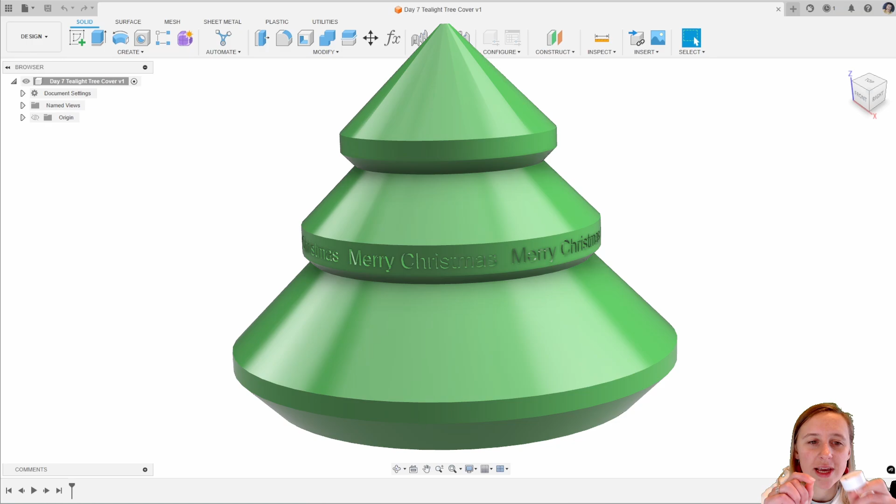For day 7, we are designing a tealight tree cover. Now, my plan is to design this such you can 3D print it in vase mode. So if you are doing that, you do need to make sure that you are using these LED tea lights. This is not safe for real fire candle lights. So make sure you're using these little LED ones. And what you want to do is just measure the diameter of the little tea light candle that you've got to make sure that this design works for your candles.

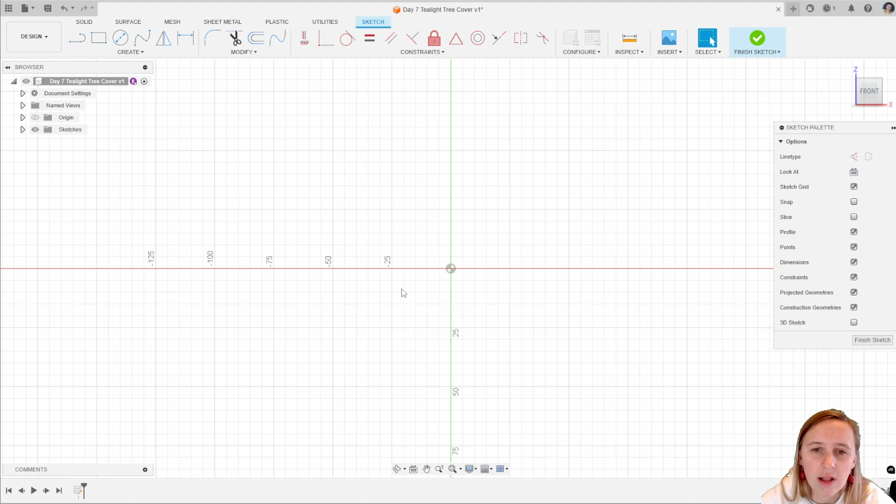So let's get started with this design. So this is a slightly easier one than last time. So we're going to start off with a sketch on the ZX plane. And this is going to be the profile that we are going to revolve to make that tea light cover. So starting off with a line, I'm going to bring that up and I want that to be 80 millimeters. And that's the height of the part. So if you've got a bigger printer, you could make a bigger one. If you've got a smaller printer, make sure you match that.

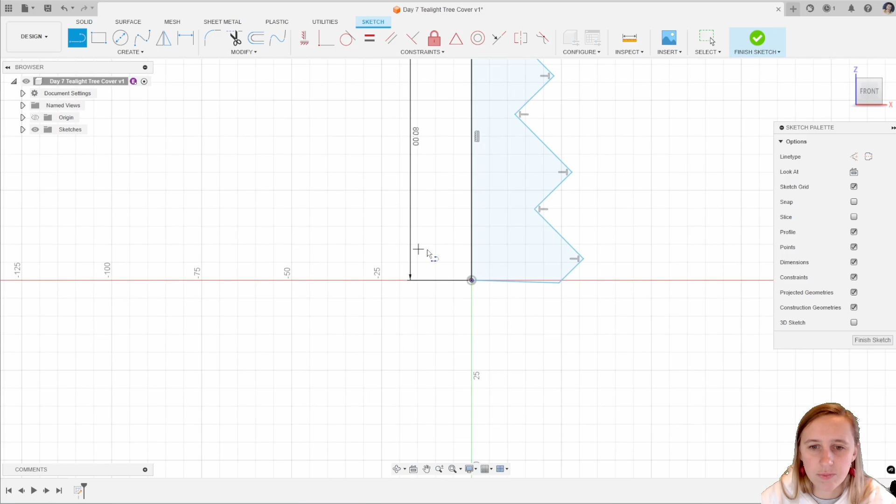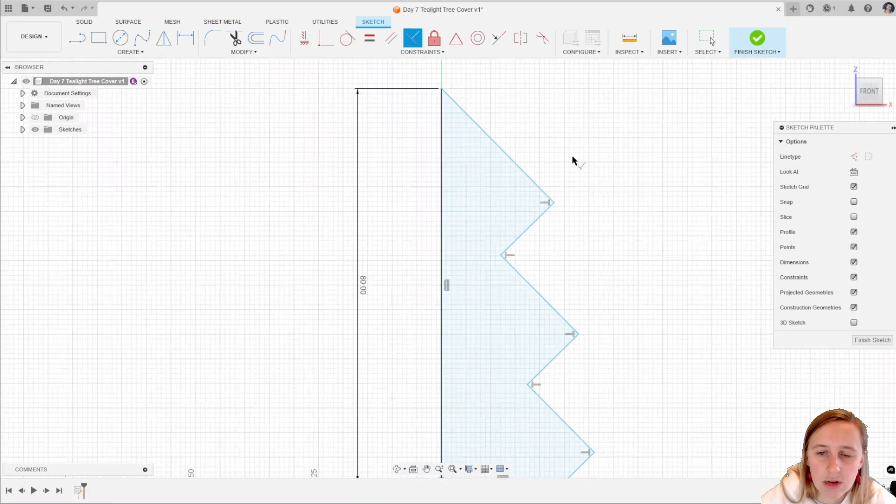And then essentially, I am just going to bring this out at 90-degree angles to create the basic profile of the part that I want to print. Now, I want this bottom line to be horizontal, so add a horizontal vertical constraint. Now, I've added these 90-degree angles automatically in that. If yours didn't add, for example, if you haven't got that and you can change the angle here, what you want to do is add this perpendicular constraint between these two lines and make sure you add that between all of these lines going down.

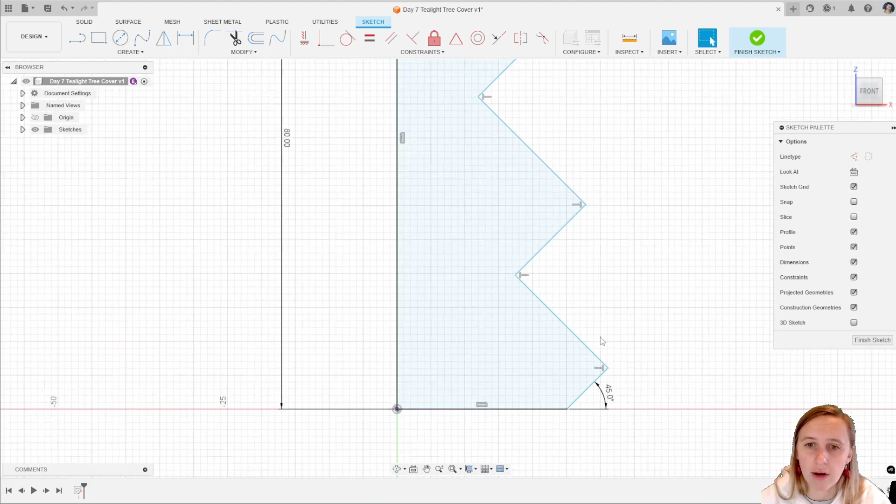This means that each of the lines in the tree will be at 45 degrees from the horizontal, which means that you can print it without any support material, so this will self-support. The final one you want to check is this last one down at the bottom. So adding a dimension between there and there, we want to make sure that one is 45 degrees. And then we can start making this the size that we want it to be.

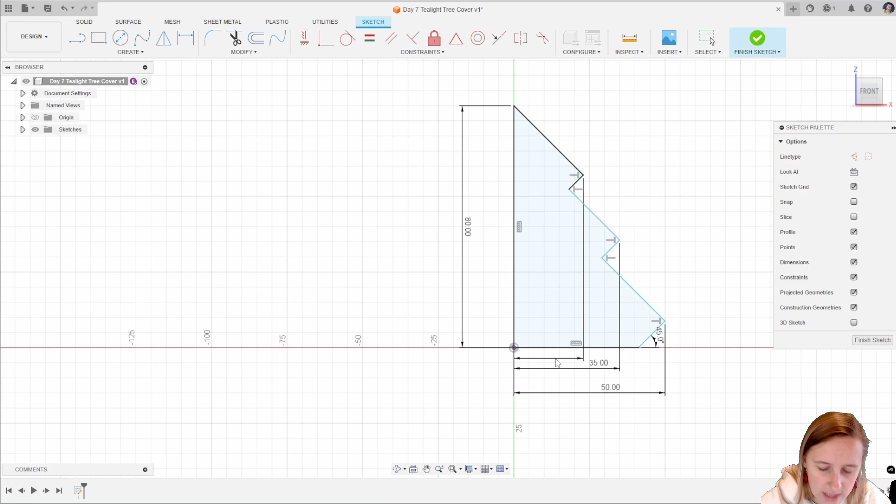So my overall size, I want to go from here to here. That is going to be 50 millimeters. And then you might just have to drag the lines to get a good size. So then the next one in is going to be 35 millimeters. And then that final one there is going to be 25 millimeters. And then you can just move these around until the design looks as you want it to be.

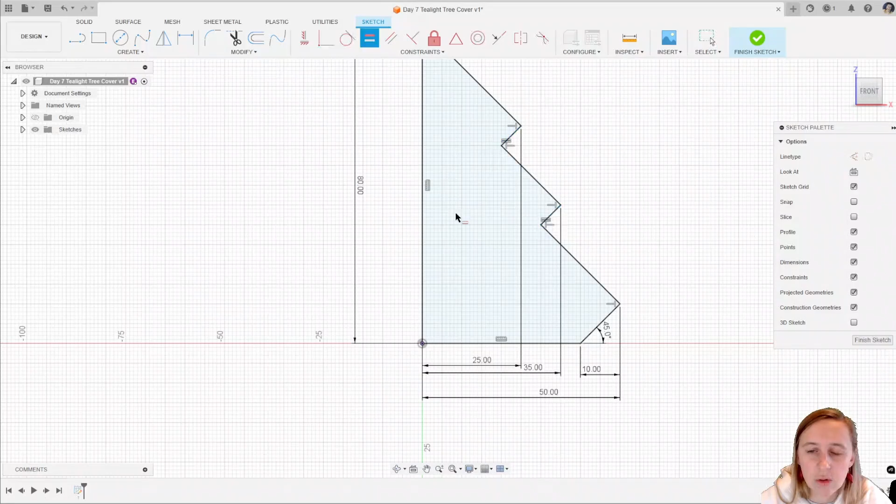So I want this one here to here to be 10 millimeters. And then I would like the length of these two to be the same. So selecting both, I'm going to use the equal constraint. And you can see that we have a fully defined sketch now. So that is the overall size of the part that I want to make.

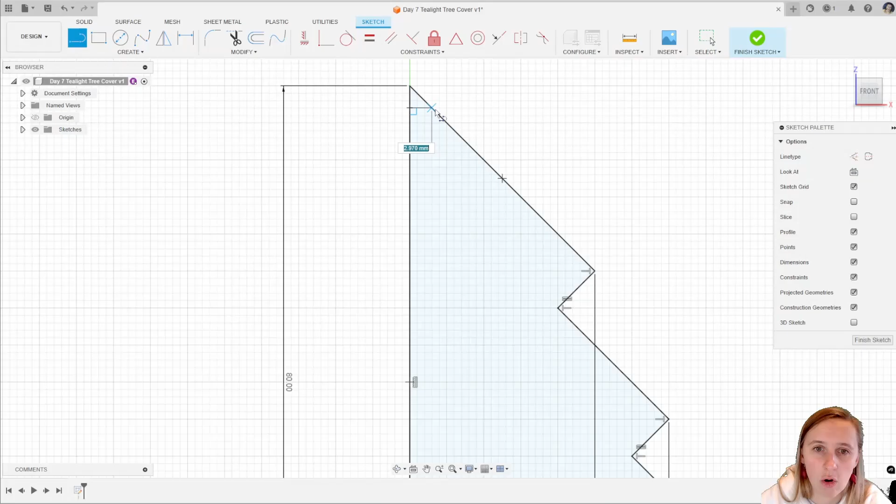Now I'm also going to add in some flats and we can use this to customize the part if we want to. And the same as we did with the bauble, we don't want a complete point at the top because this makes it difficult for the 3D printer. So I'm going to add in a horizontal line here and dimension that as 1 millimeter just to give us a small flat on the very top.

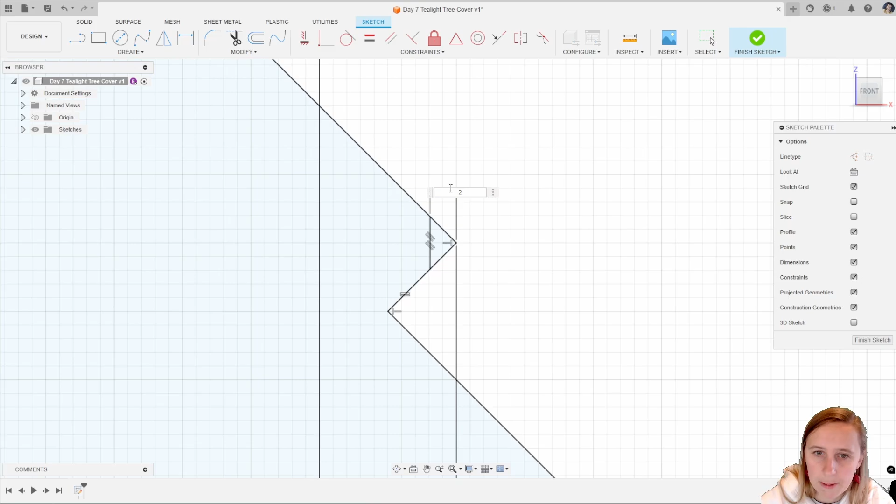I'm also going to add in a line here, a line here, and a line here. And this is going to give us a little flat. And the dimension of those, I want that to be 2 millimeters. And I want that to be the same in all cases. So just adding that in to give us a 2 millimeter point there. I'm going to finish that sketch. I'm then going to use a revolve, selecting that profile around my Z axis. And you can see there we have a very basic tree shape here.

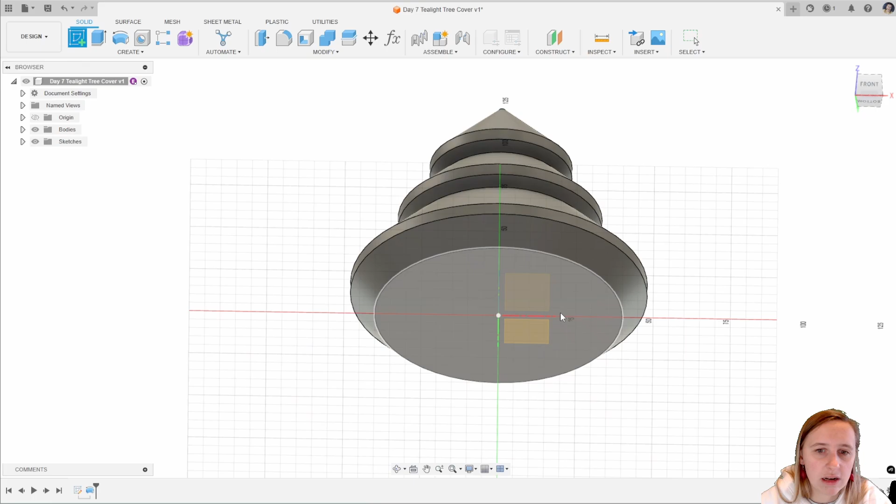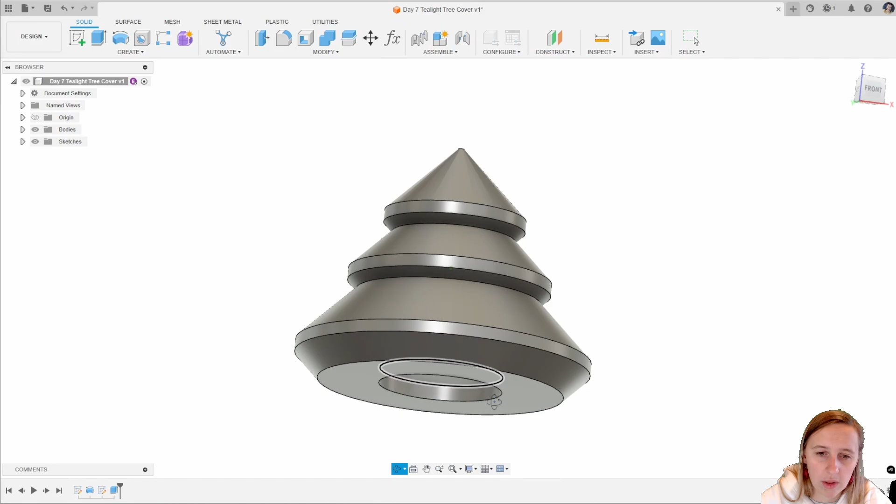So what we're going to do to make room for that tea light at the bottom is on the bottom plane, create a sketch, do a circle. Now I've measured my tea light and I know that a 40 millimeter diameter circle is going to be sufficient to stick that tea light in the bottom of there. So finishing that sketch, I'm going to create an extrude and just bring that up by 5 millimeters and an extruded cut just to give me that little profile to work with there. And that will give you a little edge that will allow the tea light to sit into.

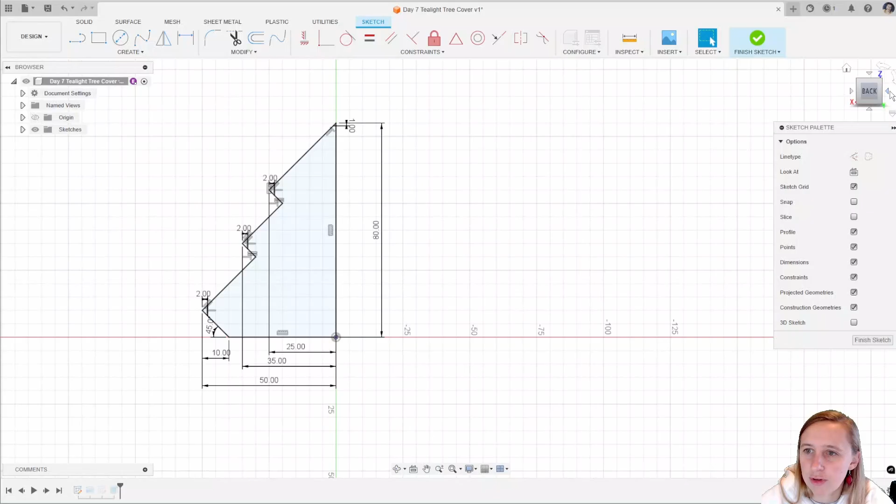Now you could just leave this design as is like this, or if you wanted, you could add a little bit of customization. So you could add in some words that say Merry Christmas around this middle band. If you want the band to be a little bit bigger, what you could do is edit this sketch. It's just flipped around from the direction we had it in before, and increase this offset here.

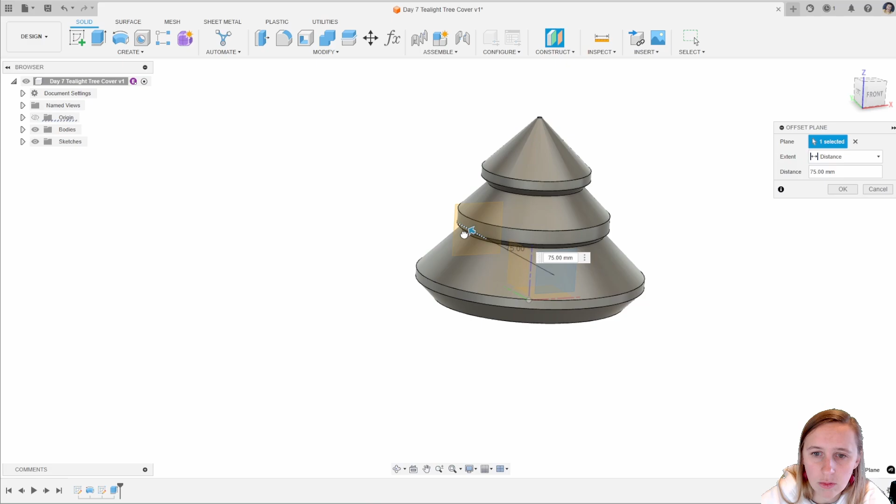So you could make that 4mm. And you can see it increases that band. So you want to make that a size that works for the text you want to do. So I might go with 3mm there. And what we're going to do is to construct an offset plane from the center plane and bring that out. So we knew that that was around 35mm out there.

And then I'm going to create a sketch on that plane that I've just created. Now I'm going to use the text tool for this. So adding some text here, I'm just going to place the box roughly where I'd like it to be. And I'm going to say Merry Christmas on here. But you could say whatever, season's greetings, happy holidays, whatever works for you.

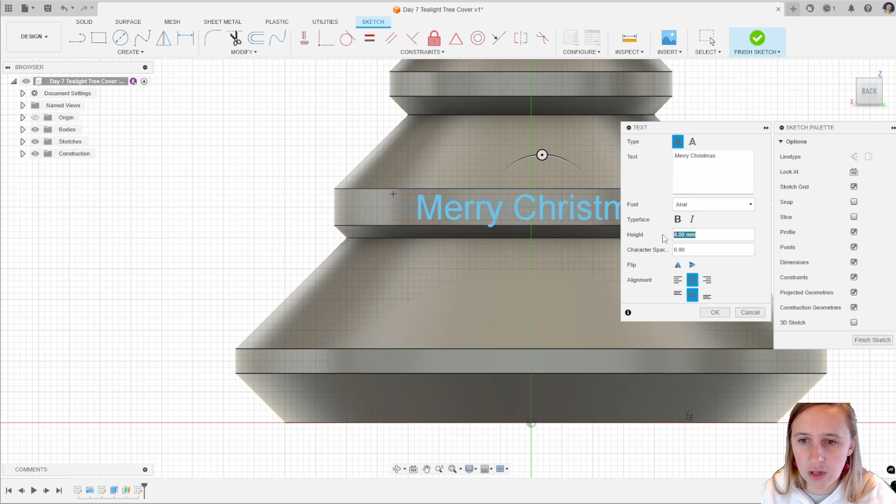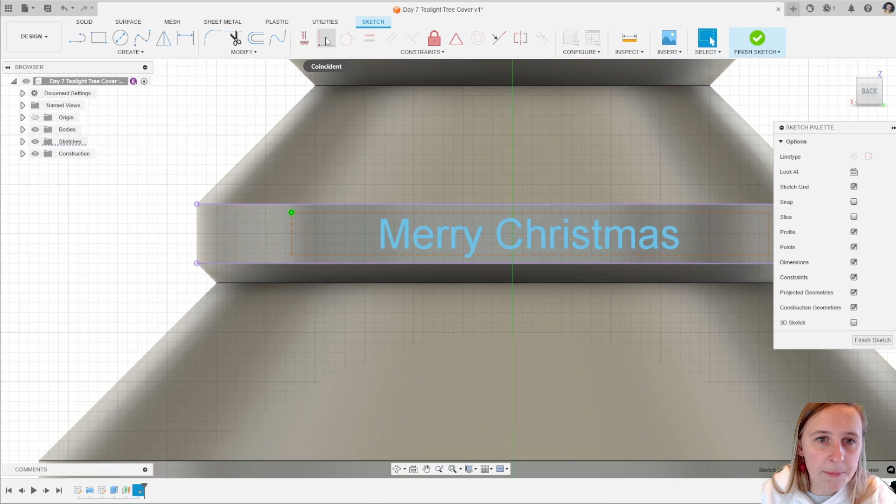So what you want to do is make sure that the size of that text is definitely no bigger than that size band that you created. You can actually, if we project through these two lines, so project that one and that one. So P on the keyboard is the keyboard shortcut. And you can define coincident that point over here and coincident that point over here, and that will put your text in the middle of that band.

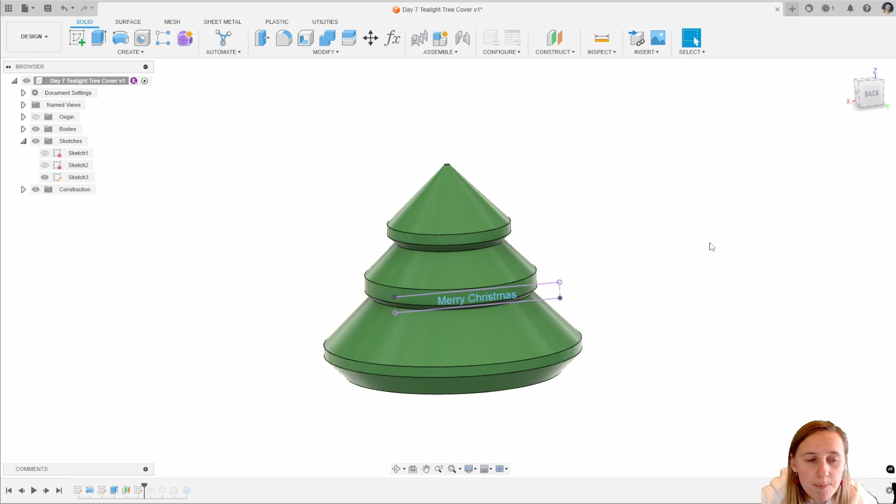I'm now going to add in an appearance to make this look a little bit more Christmassy. So A on the keyboard is the shortcut for appearance. Search for green, and I'm going to use that plastic glossy green and add in that appearance there. We're now going to emboss that text into the band that we've created to give it a bit of customization. So now that we have that text, we're going to use a deboss to imprint that onto the center band of this. So create and then the emboss tool.

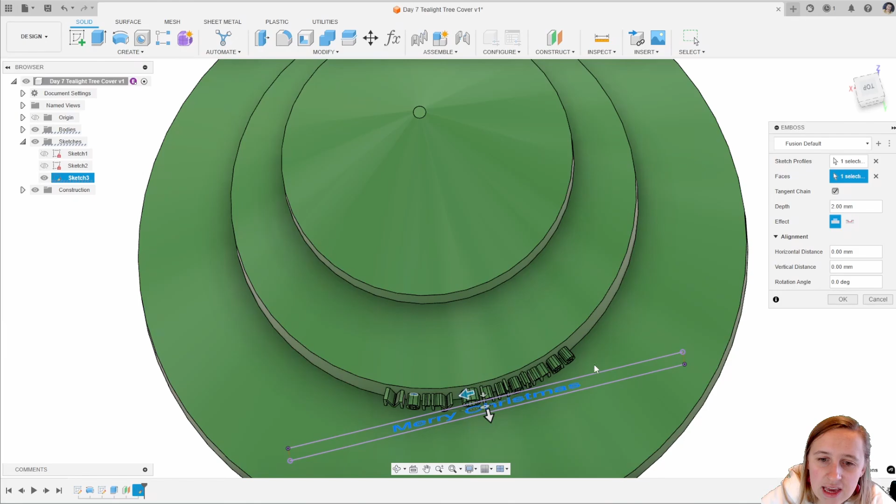The sketch profile I want to select is that text, and the face that I want to do is that circular face. Now you can see here that brings this to a curved feature on there, and we want that 2mm. Now if you're 3D printing this in vase mode, it actually is going to work much better with a deboss, so a slight cut into the part. So selecting OK there, you can imprint that text into the front of your tree there.

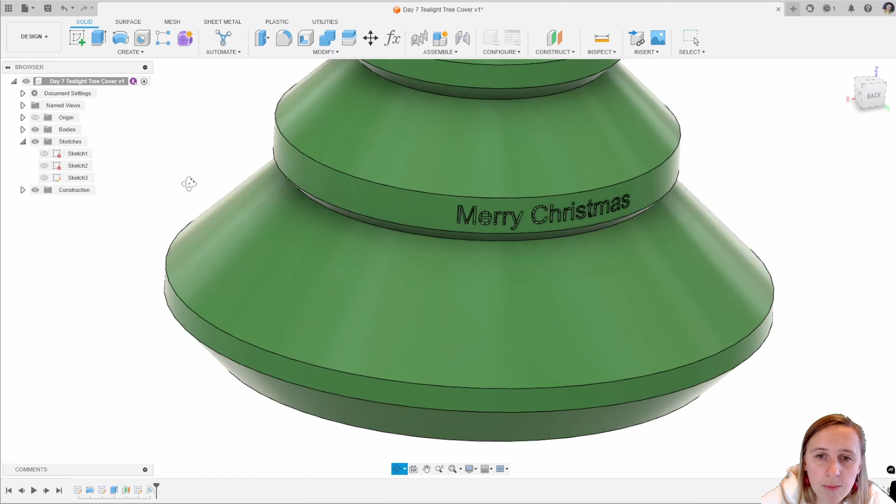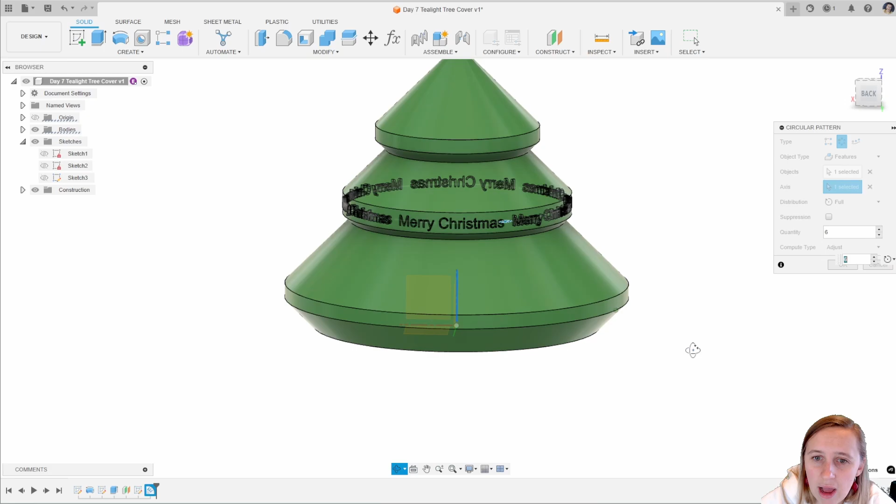And now if you wanted to, you could actually pattern this around the whole ring of this. So using a circular pattern, I'm going to pattern the feature of that deboss that I've just created and do that around the Z axis. So press and hold my mouse key and select the Z axis there. And then just increase the number until it patterns all the way around and you're happy with how that looks. So I'm going to do 6 there. And we can see now we have our tealight tree holder, and it says Merry Christmas all the way around that.

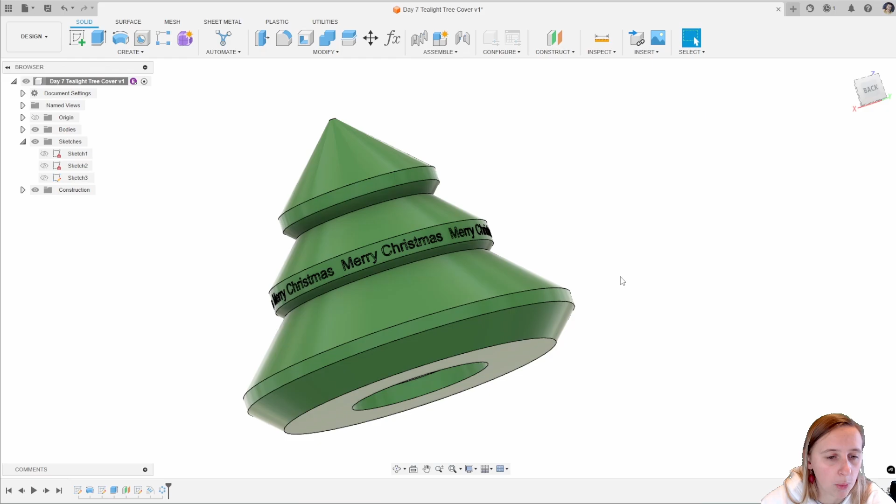Now I'll show you how to set this up for 3D printing in vase mode. So what you want to do is right click and save as mesh, selecting your format as STL, clicking OK, and exporting this to your preferred location on your laptop or PC. So load that up into your preferred slicer, and I've got that there. And then the settings I want to choose in here, I'm going to do 1 top layer, 1 bottom layer, and I want to make sure I've got vase mode on. So whatever slicer you've got, you want to make sure you've got equivalent settings to that.

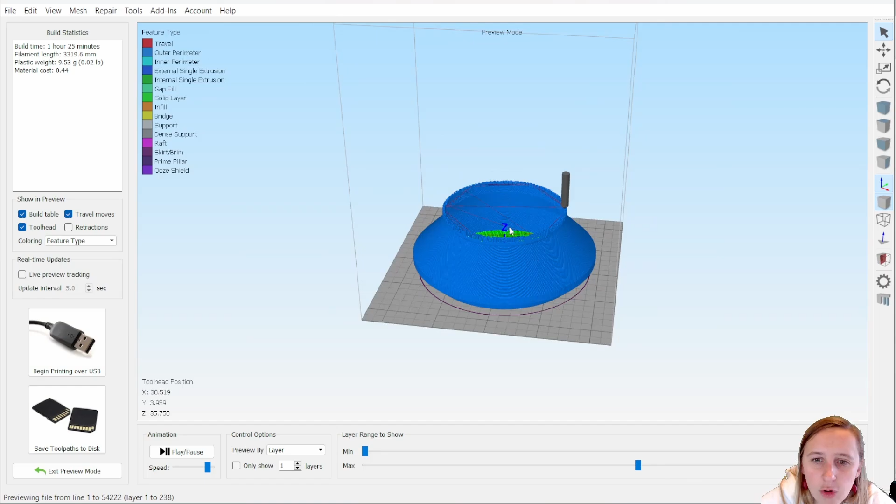So when you prepare to print that, you'll see that this creates in vase mode, and you've got that text imprinted into the part there. It's not quite vase mode throughout that section, just needs a couple of retractions throughout that, all the way through to the bottom. And then this bit where we did the extrude creates a recess to put your tealight holder in. So save that G-code file out and load it up on your preferred printer and hit print. So I hope you've enjoyed this video.